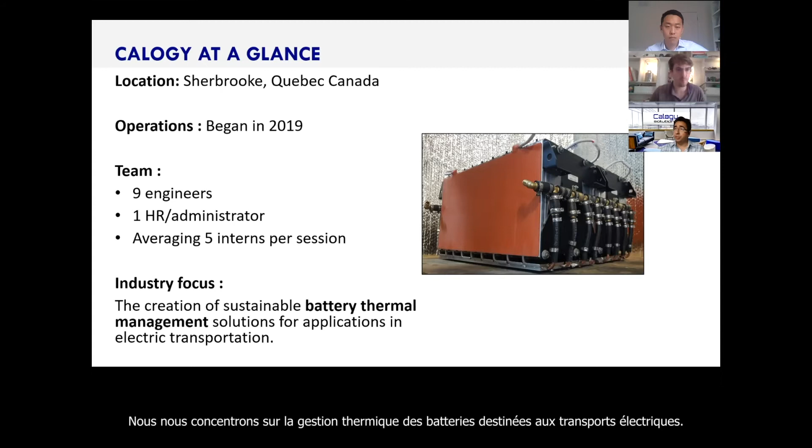So our journey began in September 2019, as I explained. So I left the university and started as employee number one. Then we started some operations, our first partnership. We started R&D. We hired the second employee in January 2020. Employees 2 and 3 joined our team right at the moment when COVID hit us hard. So basically, we didn't see them in person for 2 months.

At the time we were at the university labs, and they closed the labs. But we wanted to continue the work. So one of our guys suggested that we could use his garage. So we moved everything to his garage. We continued working, and we could continue the development. So as you see, we have really continued the long line of startups starting in a garage, and Calogy is after Apple, Google, and Amazon.

We have equipped 2 vehicles with our product to date. There is an electric bus that's already being tested in Montreal. There is also an R&D truck that's being tested. We moved into our offices lately. And in 2021, we are now accelerating our commercialization, which is our main focus now.

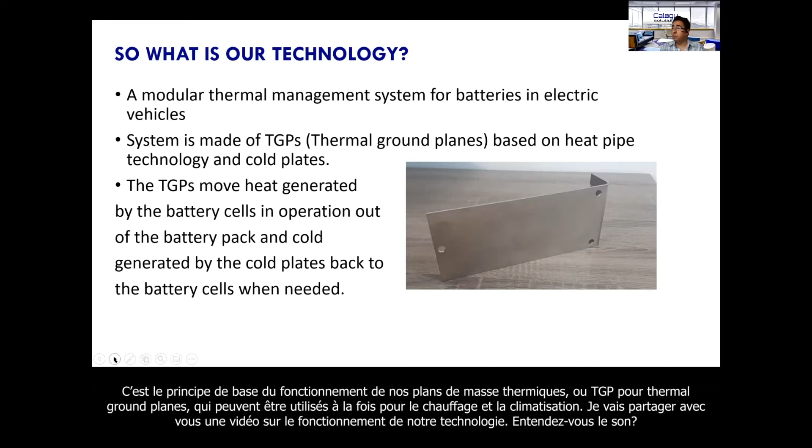This is the basic functioning principle of our TGPs. We call them TGP, by the way, thermal ground plane. And basically they can be used for both heating and cooling. So here I'll share with you a video on how our technology works.

Do you hear the sound? Oh, Mahmoud, we don't have it.

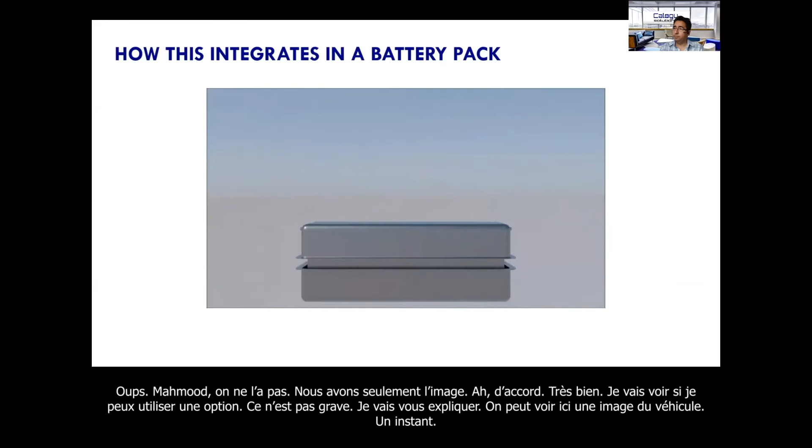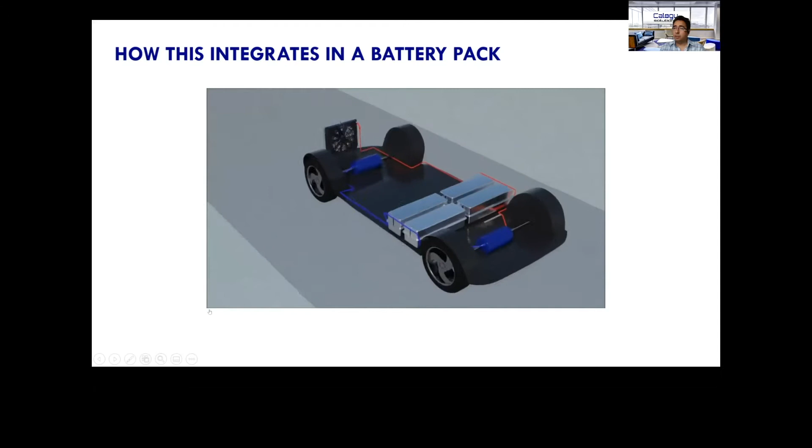We just have the picture. Okay, sorry. So let me see if there is an option. Oh, doesn't matter, I can explain. So here you see an image of a vehicle, and just a sec, I'm going to.

So here we see an image of a vehicle, a battery pack. So if you look at the battery pack, these are prismatic. They can be prismatic cells, or they can be cylindrical cells, basically in a bunch in a module. Our TGPs are these thin sheets that are put between the modules. They absorb the heat, they transfer it to this top part. This top part, the condenser side, is in contact with a liquid cold plate, or it can be with an

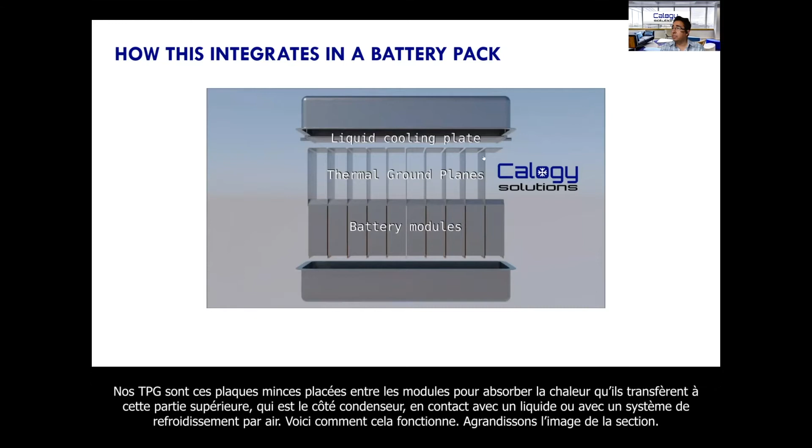air-cooled system. And the way it works, here we see a zoom picture of the cross section. So this is an example of how a TGP basically can be in contact with a heat sink. As I explained, the method is basically based on liquid vapor phase change, and a thermal ground plane can transport the heat to the heat sink for the cooling.

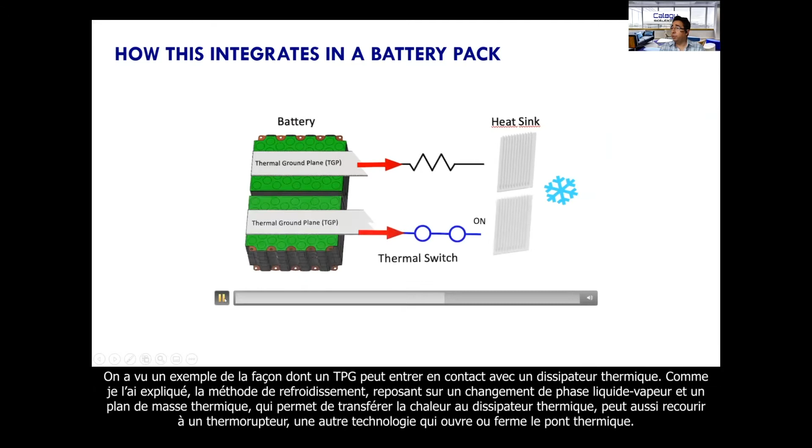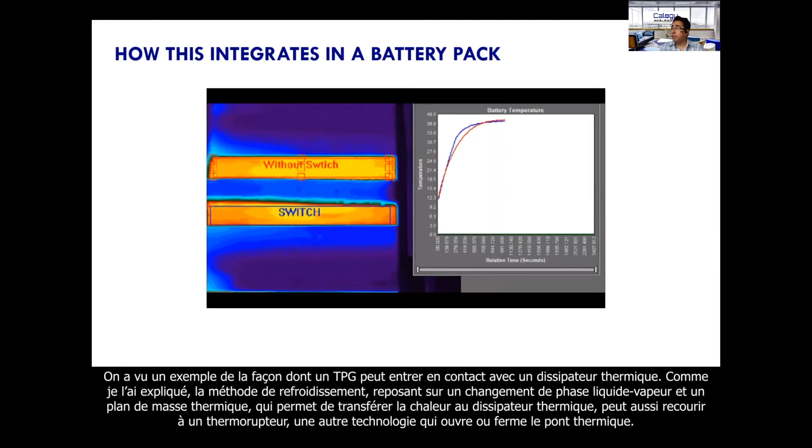It can also be put together with a thermal switch, which is another technology that we have developed to basically open or close the thermal bridge. Here you see the example of functionality of the switch. So basically, when the switch is closed, the thermal path is established, and the heat starts to dissipate from the system. But when the switch is open, much less heat is lost from the battery pack. So it's a technology that we have developed for winter conditions. It's a patent pending technology.

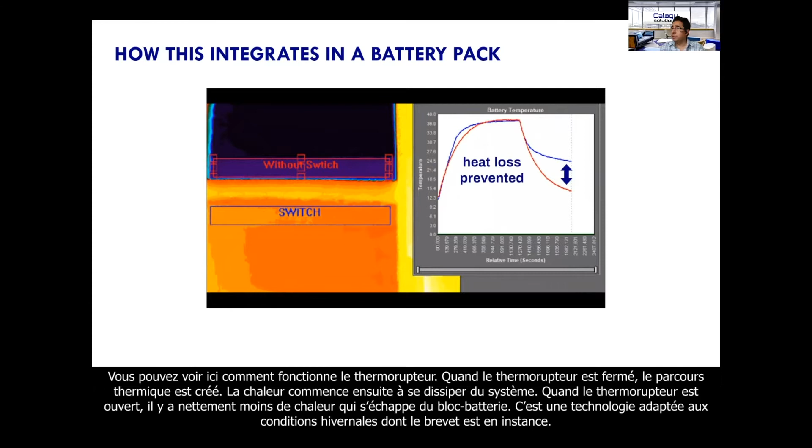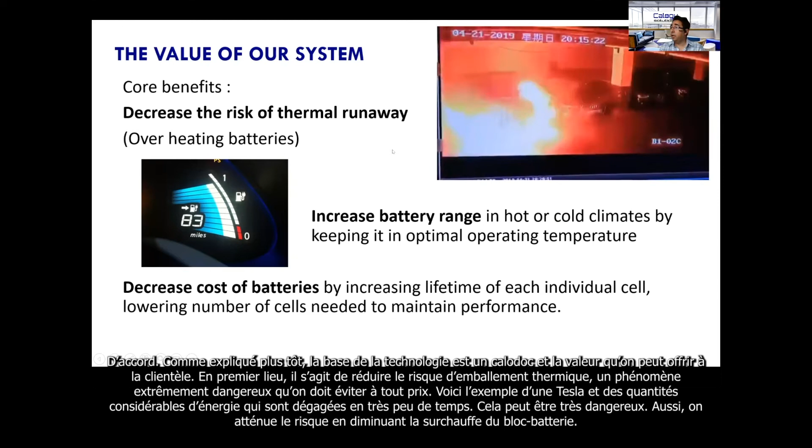Perfect. So yeah, as I explained, the basis of the technology is heat pipe. The values that we can bring to the customer, first of all, is decreasing the risk of thermal runaway. Thermal runaway is a very, very dangerous phenomenon that we want to avoid at any cost. Here you can see an example. Look at the Tesla here. Huge amounts of energy that are freed in a very, very short time. So it can be very dangerous.

So basically, we decrease the risk by decreasing the overheating of the battery pack, and also allowing for the battery pack to be built in a hermetic enclosed fashion, which is important for applications like marine and electric aircraft. We can also help increase the battery range, especially in winter conditions, by keeping the battery pack in the optimal operating range.

Another very important part is decreasing the cost of the battery packs. The battery packs are typically over-designed right now to account for the cell aging and cell degradation that happens over time. So our technology can decrease the cell aging by providing a uniform cell temperature, and that has a direct impact on the cost of the battery pack. We have done some estimations. We estimate our technology can increase the life by 2 years, and also decrease the cost by 5 to 10%, because we use less cells.

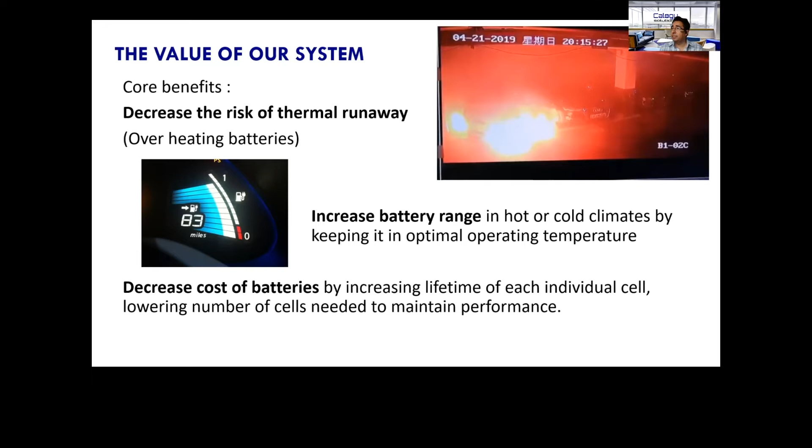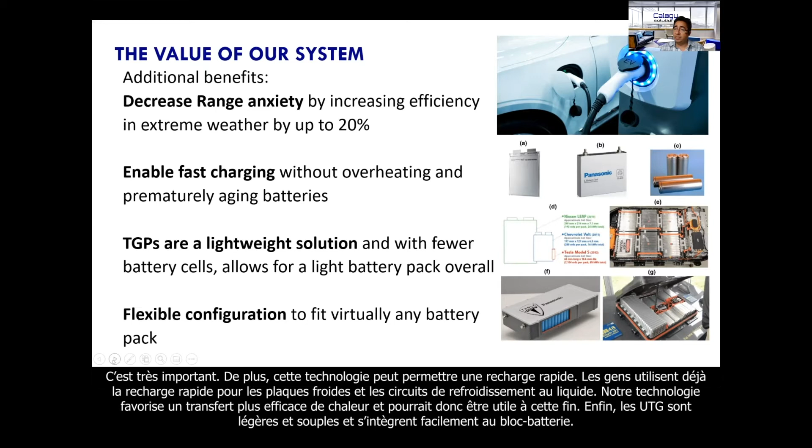So currently, it's a few months since we moved to our facility. We have been working hard to develop our first generation, our MVP, minimum viable product. That MVP is ready. Now we're going to a commercialization phase, which is a challenge in itself. As you've seen, the team is mostly composed of engineers. Now this one is new because we're going to be working with business people. So it's a lot of learning curve for us.

We are putting together also a small semi-automatic prototyping line. We are trying to produce like 1,000 TGPs per year. That's our objective. 1,000 may seem a lot, but each vehicle typically needs 50 to 100 TGPs, the same number as the cells. So the number can increase pretty quickly. So we're talking about 10 to 15 vehicles.

We're also expanding very quickly. We're hiring new talent almost every 2 months. We have purchased a lot of equipment, and finally, for the first time, we're going to participate in the Battery Show US this year, in 2 months. Thanks to the Quebec and Canadian governments, they give us space to showcase our technology.

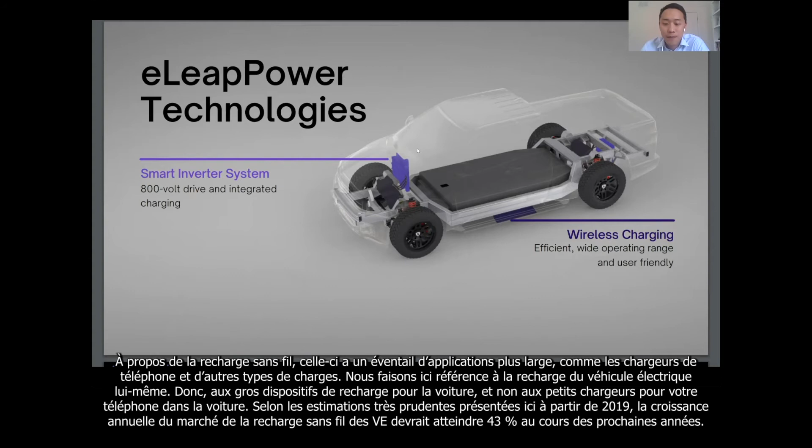Of course, if there are local innovative companies like eLeapPower to help highlight our innovative solutions and attract global OEMs, the local market growth can be accelerated, because OEMs, by working with us, can understand local markets and local innovations better.

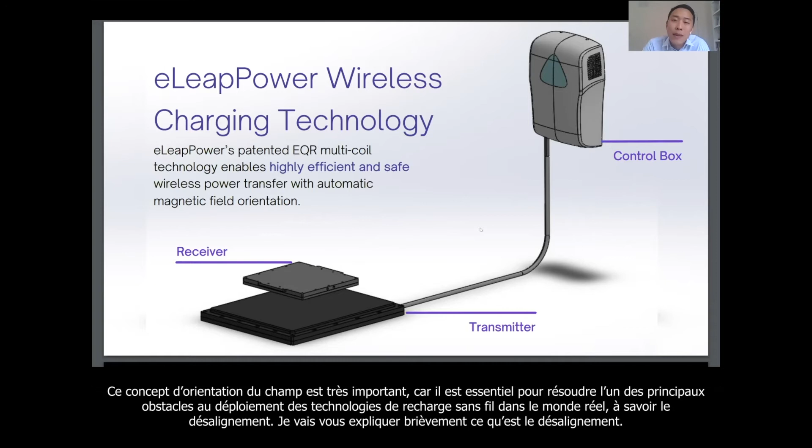The misalignment problem. Misalignment here is defined as the center-to-center offset between the transmitter and the receiver. So you have those two rectangle pads, transmitter and receiver, and they both have a center. The center-to-center offset is defined as the misalignment. This can occur across vertical, lateral, longitudinal, and angular misalignment.

The efficiency of the wireless energy transfer highly depends on this misalignment, and will continue to decrease rapidly as the lateral misalignment reaches approximately 10 to 15 centimeters. The 10 to 15 centimeters, you can visualize this as half of your tire width, regular car tires. It's half a tire width. If you park beyond half a tire width, you are charging at a very, very low efficiency. I can go to the next slide to show you what it is.

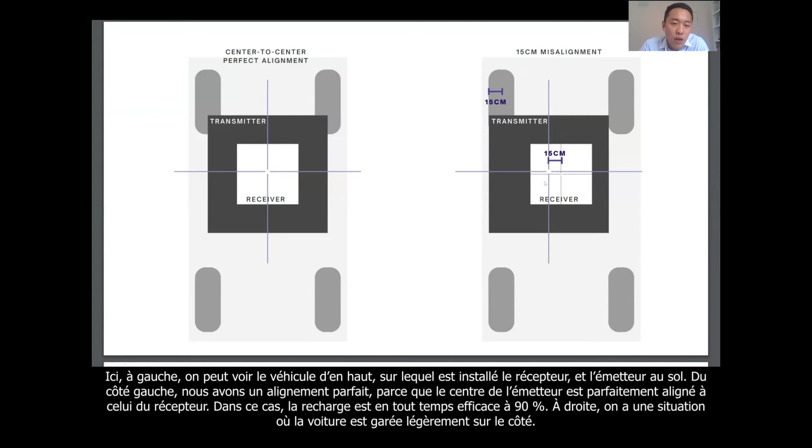But I just want to emphasize again, the misalignment is defined as center-to-center offset between the transmitter and the receiver. And the most critical offset is the lateral misalignment. So here on the left-hand side, you see the vehicle from the top. You have the receiver that's mounted on the vehicle. You have the transmitter on the ground. On the left-hand side, you have perfect alignment because the center-to-center of the transmitter and receiver is perfectly aligned. And this is the condition where we always receive 90% efficiency in charging.

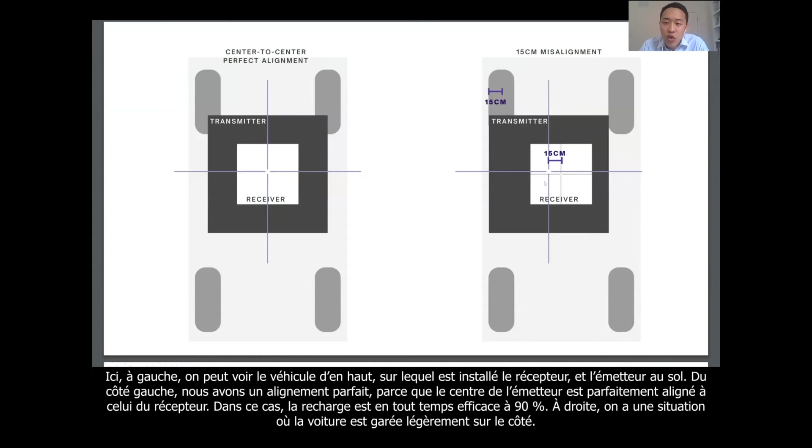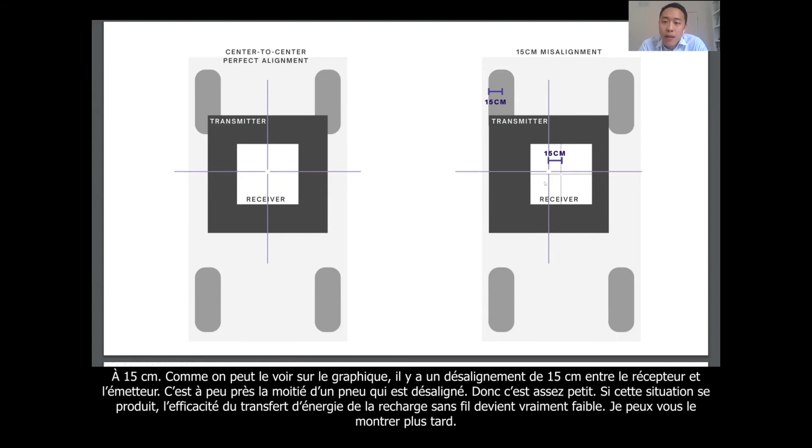On the right-hand side, you have a situation where the car is parked slightly to the side. So there's 15 centimeters, as you can see on the graph, of misalignment between the receiver and transmitter. This is roughly about half a tire width of misalignment, so it's fairly small. And if that condition happens, the power transfer efficiency of the wireless charging becomes very, very low, and I can show you in a later graph.

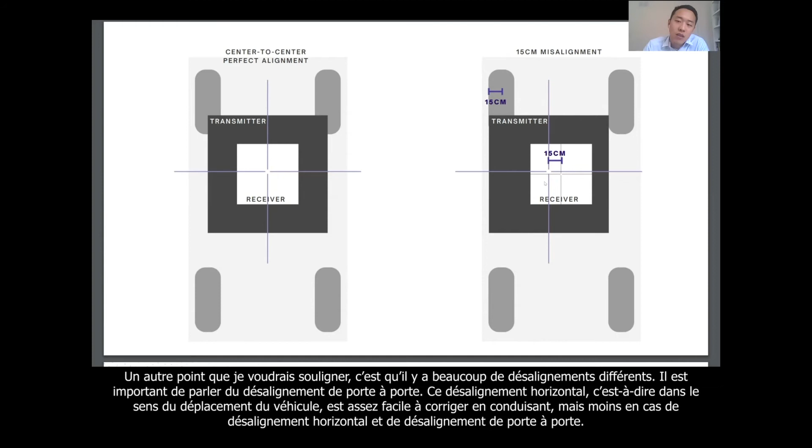And one other point I want to make is that there are many different misalignments. It's important to talk about door-to-door misalignment, this horizontal misalignment, because if it's in the direction of the vehicle driving, the vehicles can relatively easily make adjustments. But with the door-to-door misalignment, if you imagine you're parking in a parking lot and try to park in the center of two lines on the ground, it is very difficult because then you have to do multiple reparkings to get to the perfect spot, and you might never get there. I know I cannot, so it's a real challenge in this case.

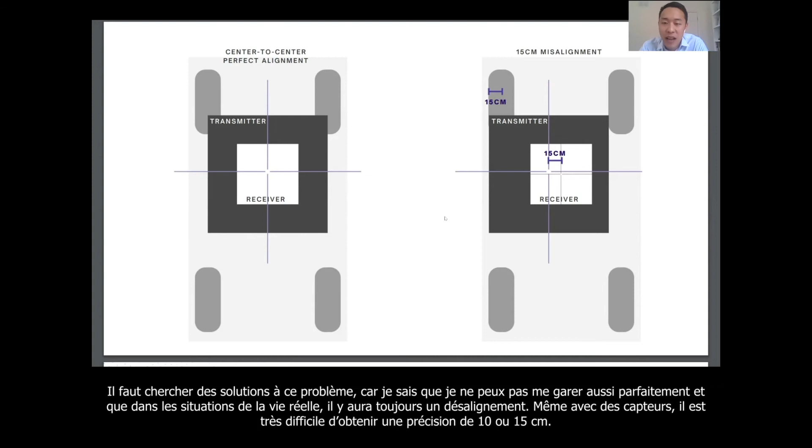It is important to look at solutions for this because I know I cannot park so perfectly, and with real life situations, there's always going to be a misalignment. Even with sensors, it is very difficult to get within 10 centimeters, 15 centimeters of accuracy. And in looking for solutions, it's also very important to put the constraints in place. I think we need to highlight the benefit of wireless charging.

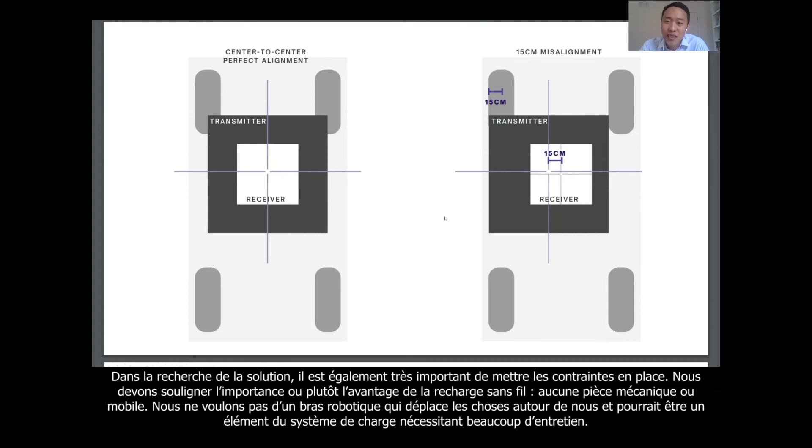Definitely no mechanical moving parts. We don't want anything like a robotic arm moving things around. That could be a high maintenance piece of the charging system. We don't want anything on the ground that can trip or does not work with different vehicle sizes. We want to keep it as much electrical as possible with no moving parts.

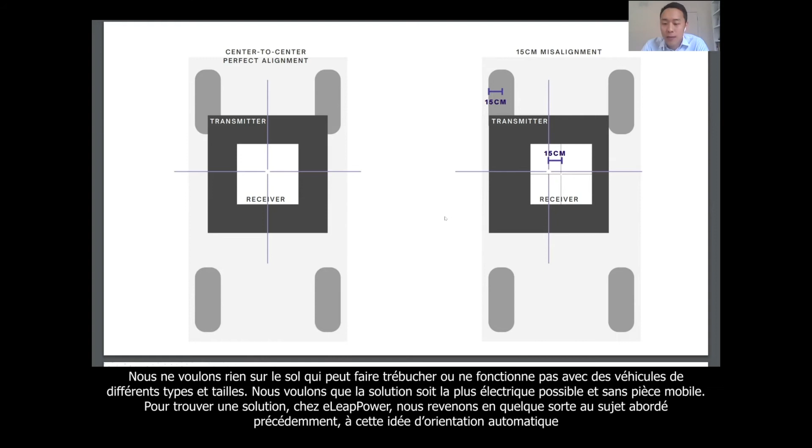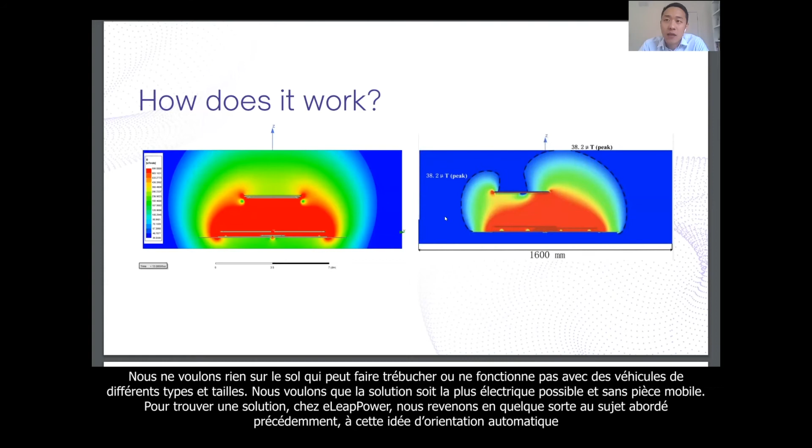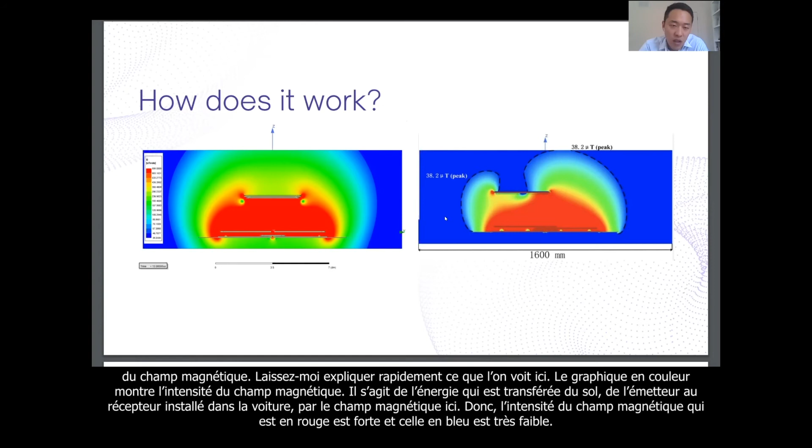So in coming up with a solution here at eLeapPower, going back to the previous topic I mentioned, we have this idea of automatic field orientation. Let me quickly explain what we are seeing here. What we are seeing with the color graph is the strength of the magnetic field. So we talk about the energy being transferred from the ground, which is the transmitter pad, to the receiver, which is mounted in the car, through magnetic field over air. So the color is the strength of the magnetic field. Red is stronger, and blue is very low strength.

On the left-hand side, you have perfect alignment again. As you can see, the field is perfectly centered around the receiver. However, if you have a misalignment situation, if things are shifted to the left-hand side, it's not going to be centered anymore, because the receiver and the transmitter need to be coupled. Which means that you are shooting a lot of magnetic field to your receiver, but it's not captured. Some of it is captured, some of it is not, and there's going to be a lot of efficiency drop in that situation.

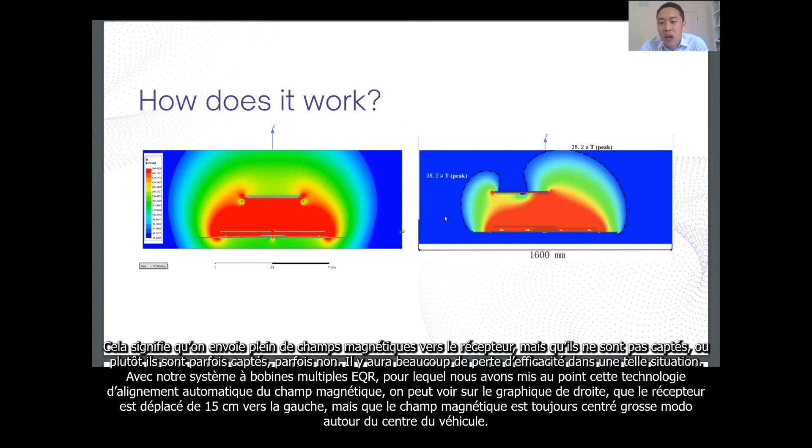With our EQR multi-coil system, what we came up with is this automatic magnetic field alignment technology, where on the right-hand side graph, you can see that the receiver is moved to the left 15 centimeters. However, the magnetic field is still centered roughly around the center of the vehicle. And this is very important because most of the energy in this case will be captured by the receiver, and there's no uncaptured leakage field flying around everywhere.

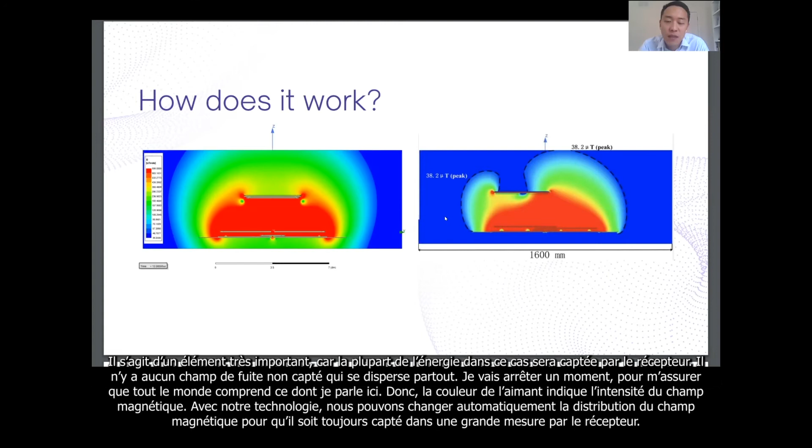So I just want to take a pause here, make sure that everybody understands what I'm talking about. The color indicates the strength of the magnetic field, and with our technology, we have the ability to automatically shift the field distribution so that most of the magnetic field is still captured by the receiver.

The technology becomes unusable. You are essentially transferring less than a quarter of power into your receiver, and this causes a lot of problems. However, with our automatic magnetic field orientating technology, the EQR multi-coil technology, we're able to maintain over 90% efficiency over a very wide range of operating points.

This is very essential for real-world applications because, as I just mentioned, to park within 10 centimeters or 15 centimeters, half a tire width, is going to be very difficult. We cannot just sit around and wait for sensors to improve. Even with sensors today, it's not possible to park with such accuracy.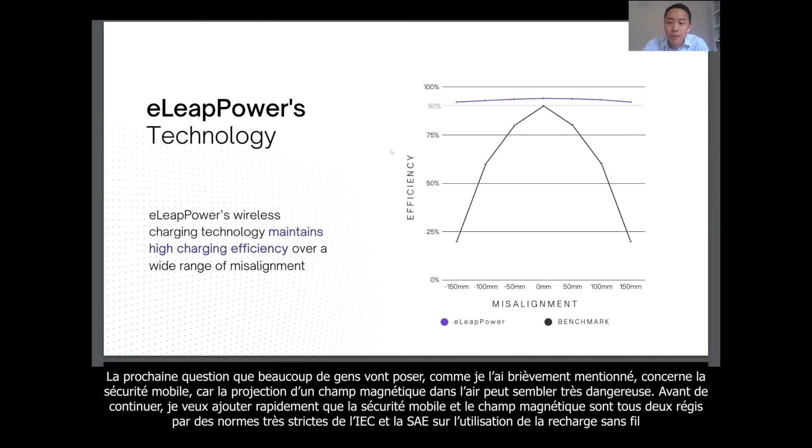The next question I think a lot of people will ask, which I briefly mentioned, is: what about safety? Shooting a magnetic field through air sounds like something very dangerous. This topic I want to briefly address before moving on. There are very strict international standards, both IEC and SAE, governing the usage of wireless charging technology to make sure that any stray leakage magnetic fields are below the well-established safety limits that we are already familiar with from other consumer devices.

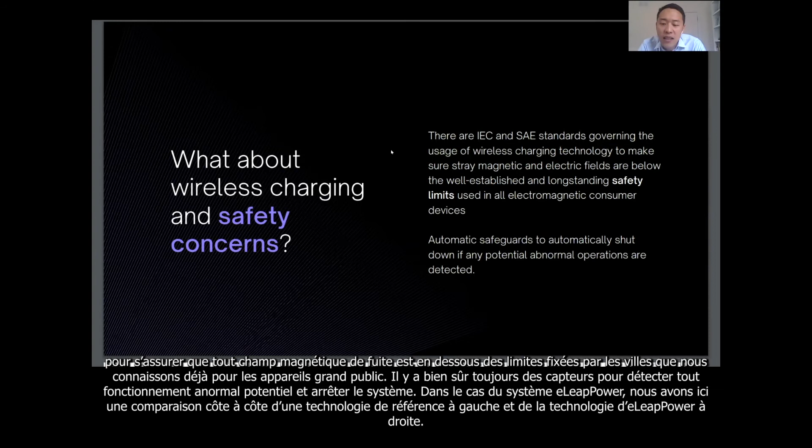And there are always, of course, sensors to detect any potential abnormal operations to shut the system down. In the particular case of the eLeapPower technology, here we have a side-by-side comparison of a non-eLeapPower benchmark technology on the left-hand side and eLeapPower technology on the right-hand side. As you can see, this safety limit of the magnetic field is much smaller on the eLeapPower side, which means that the field is much better contained.

So the chances of this field going beyond where the car is and damaging or hurting anybody on the side is almost not there. It's potentially not there. It's even much smaller than the benchmark technologies that already meet the standards.

So just to repeat, on the left-hand side, you have the benchmark technology, existing wireless charging technology. On the right-hand side, you have eLeapPower technology, where both of them are misaligned 150 millimeters to the left. And you can see the dotted line encloses the safety magnetic field limits, and it is much smaller, much safer on the eLeapPower side because the field is more concentrated in transferring power.